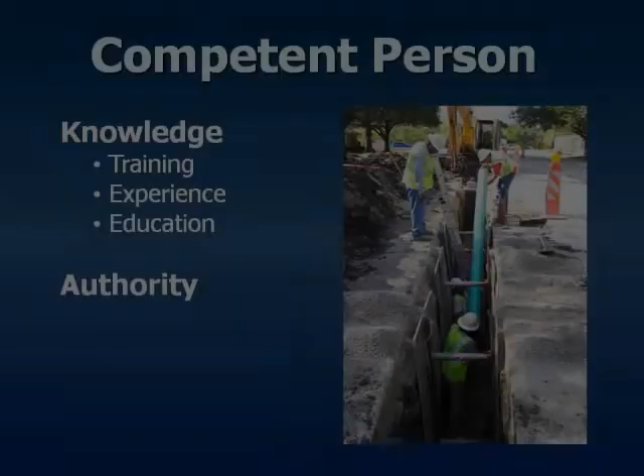For example, if you're going to be sloping and benching, that person needs to know how to do a soil classification and apply the appropriate slope. But another important aspect that people sometimes forget about is the actual authority. Typically, the employer or somebody has to designate that individual to be competent to have the authority over the work site so they can make those decisions and stop work if they need to make the appropriate corrective actions.

Once you choose that you're going to use sloping and benching as your method of cave-in protection while working in a trench, a competent person is going to do a soil analysis to determine whether or not they have stable rock, a type A soil, a type B soil, or even a type C soil. In order to do that analysis, they have to do at least one visual analysis and one manual analysis.

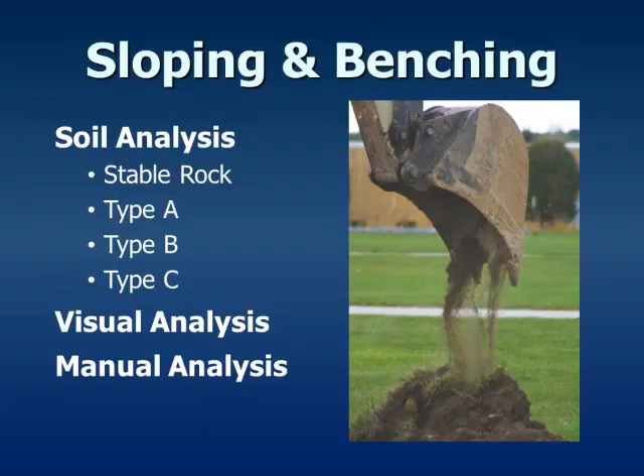Additionally, you're going to want to look around the trench, see if there's any existing utilities or any other signs to indicate that soils have been previously disturbed. Also, as you're excavating, you'd want to look at the trench itself and see, are you getting into where you've got maybe water that's seeping into the trench.

Once you do that visual test, you want to do a manual test also. There are a few different manual analyses that contractors typically use to determine the soil type. One manual analysis is used to determine whether or not you have a cohesive soil.

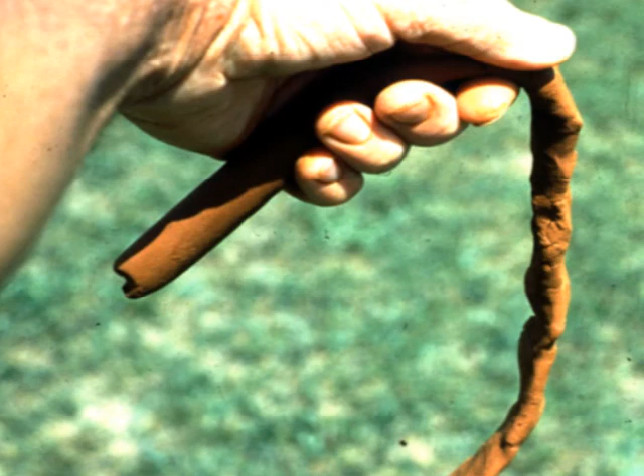That's commonly referred to as the ribbon test, which means you basically take a sample of the soil and roll it in your hands and try to thread out a ribbon that's about 1/8 inch diameter. And if you're able to do that and take a 2-inch length of that ribbon and hold on to it without it breaking, you would determine that you then have a cohesive soil.

Other manual tests you can do determine the compressive strength of the soil. You can use a couple tools with that, or you can use your thumb to do what's called a thumb penetration test, where you actually take an undisturbed sample of cohesive soil and push your thumb into that soil.

A more definitive test is to actually measure the compressive strength, and you can do that with a torvane shear, or a pocket penetrometer. And with that pocket penetrometer, you take the penetrometer and push it into an undisturbed sample of the soil and take a reading.

And if your reading is less than 0.5 tons per square foot, you have a type C soil. If it's between 0.5 and 1.5, you have a type B soil. And if it's better than 1.5, you could have a type A soil.

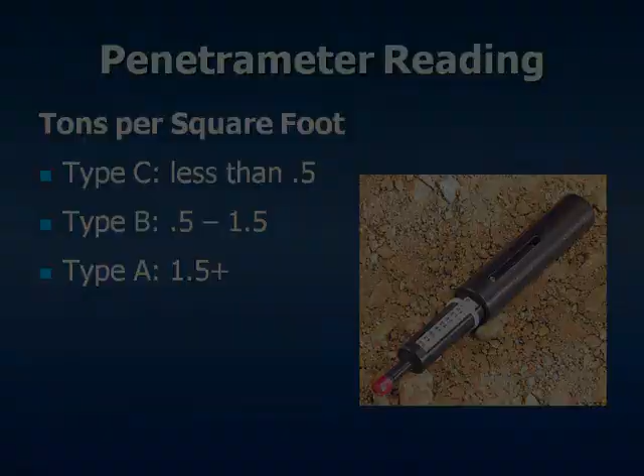Shannon, when we have layered soils or stratified soils, how do you classify that? Well, it's very common that you're going to have multiple layers in a trench. You may have a trench that's 10 feet deep, and the top 5 feet is maybe a type B clay material, and the bottom 5 feet is a type C sandy material. You're going to want to classify those layers individually to determine what types of soil you have. You have to slope it according to the weaker layer.

Now, any trench that's over 20 feet in depth, the sloping system should be designed by a registered professional engineer. For trenches that are less than 20 feet deep, based on that soil analysis you've done, you can assign the appropriate slopes. Now, if you have a type A soil, your slope should be at least 3/4 to 1.

That's for every 1 foot of depth, you have to cut that trench wall back 3/4. So if you had a 10-foot deep trench, you would have to cut that trench wall back approximately 7.5 feet. For type B soils, you're going to have a 1-to-1 slope, and for type C soils, you're going to have a 1.5-to-1 slope.

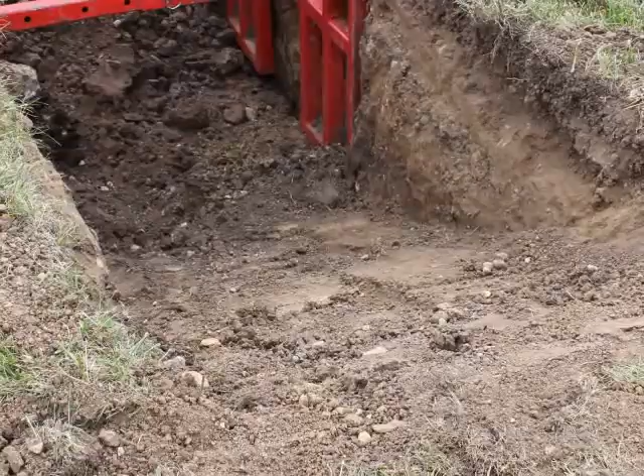An important thing to remember when determining the appropriate slope is if you're going to measure your slope, you need to start measuring from the bottom edge of that excavation or that trench wall and measure up.

In addition to sloping, another option you have is to actually bench the trench. Now, a bench is actually a situation where you're going to step up the wall of the trench. And there's a couple different benches you can do. There's a simple bench and there's a multiple bench.

A simple bench is where you put in one bench where you can come up vertically approximately 4 feet, then you go horizontally approximately 4 feet to make like a step. If your trench is deeper than 4 feet, then from there you can apply the appropriate slope moving up the rest of the way of the trench.

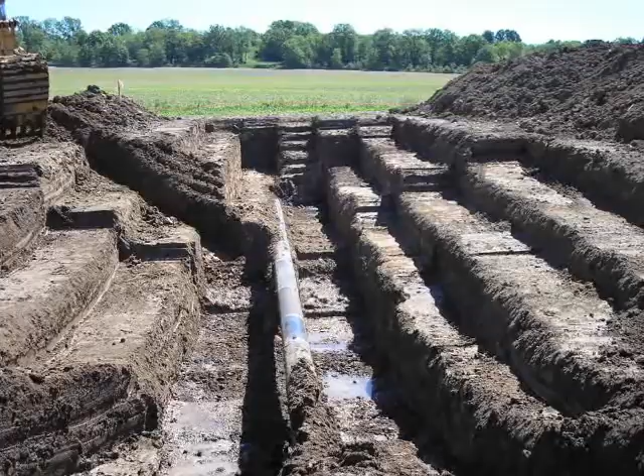Another option you have is the multiple bench, where you would do the same thing, except that when you make that first horizontal step of 4 feet, now you're going to start benching up, but you've got to make sure that you keep those benches behind that slope line. So if you've got that type B soil, you are still maintaining that slope, it's just that you're putting steps in. One key point to remember is that benching is something that's not allowed in type C soils. So for example, this trench we have here today, we've analyzed the soil as a type C, and we would not be able to bench in this type of soil.

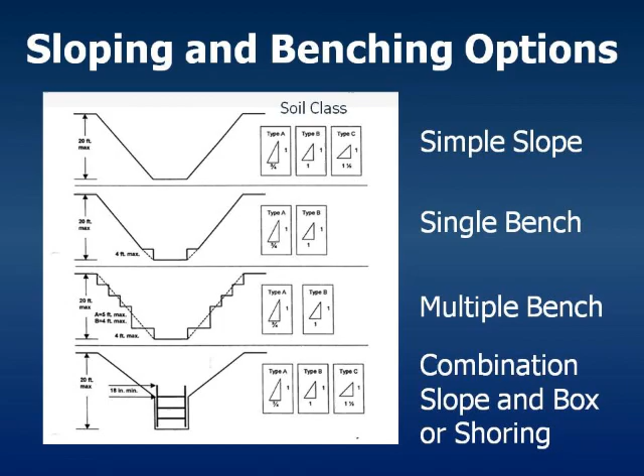Let's take a quick review. When sloping or benching, you do have a number of options. Once the soil is classed, you can excavate a simple slope, single bench, multiple bench in the proper type of soil, or you can use a combination of protection factors with sloping and installing a box or shoring system.

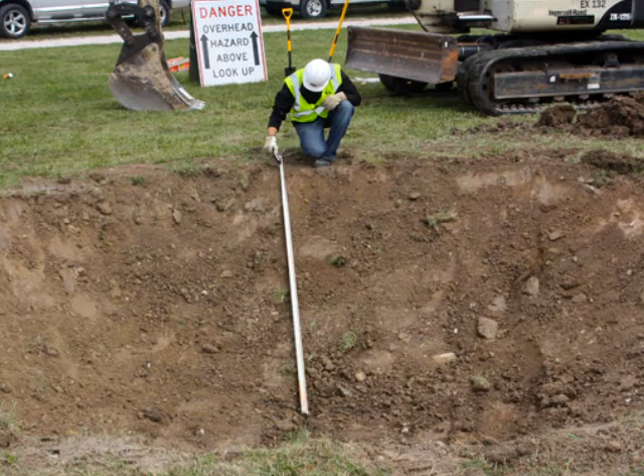What we have set up here today is we have a trench that's approximately 5 feet in depth. We've got a trench box that's been set in there, and then it's been ramped on each side for access and egress. What we've done here now is we've taken the trench box out and we've sloped the trench back to the 1.5-to-1 slope that this type of soil would require, which you can see we're measuring with our trench pole and our angle indicator.

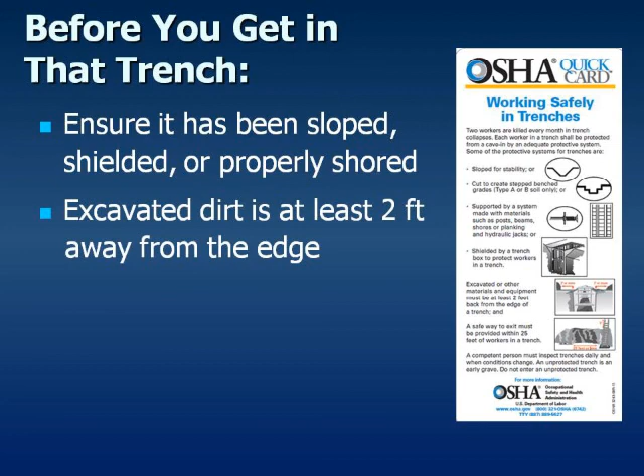Before you get in that trench, ensure it has been sloped, shielded, or properly shored. Excavated dirt is at least 2 feet away from the edge. There is a safe way to exit, and that a competent person has inspected the trench for your safety.

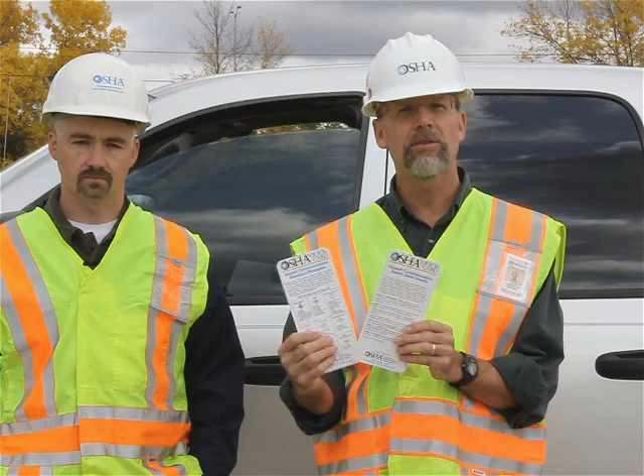Over the past year, OSHA has adopted 2 new standards. Number 1, we looked at our new hazard communication standard where we adopted the Globally Harmonized System. Essentially what that deals with is that we're going to be looking at new material safety data sheets called SDSs, safety data sheets, and we're going to be looking at new ways of product labeling. Over the next several years, employers have responsibilities for training employees as well as collecting all those new safety data sheets. OSHA's provided some fact sheets as well as new quick cards to help employees understand the new requirements.

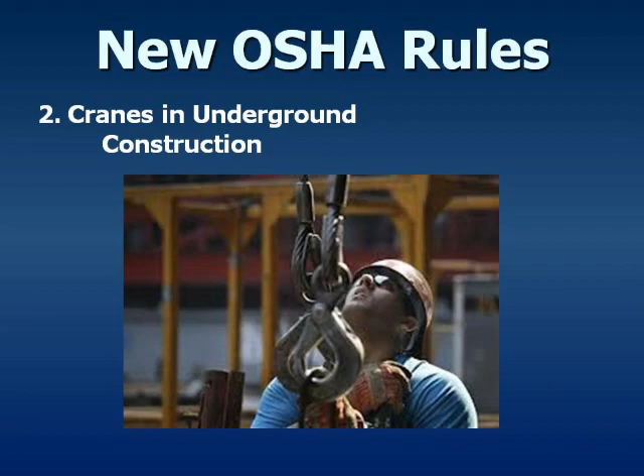Chad, the second change in this year's regulations was the adoption of the new crane standard. Yeah, with the new crane standard that took effect just in the last couple of years here, the underground construction industry was not covered by that standard. There's a change in the works right now where underground construction, which is primarily going to cover the tunneling industry, is now going to be covered under that crane standard. Chad, what have the inspectors been finding this year?

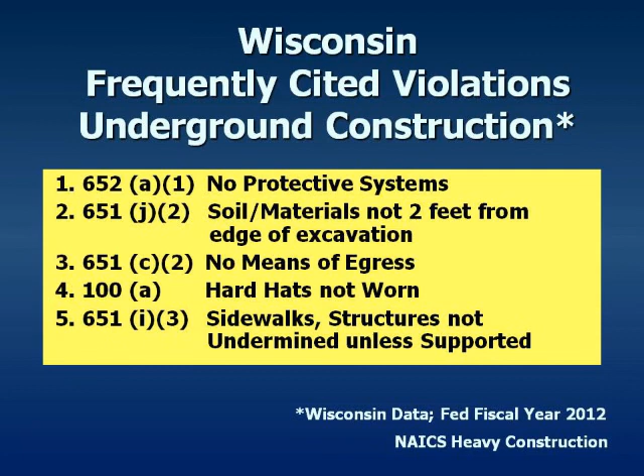Well, in the underground construction industry, the top 5 violations compliance officers have been finding include no protective systems utilized for trenches over 5 feet in depth, the soil or materials not being at least 2 feet from the edge of the excavation, no means of egress from the excavation, hard hats not worn, and sidewalk structures are not undermined unless supported. No protective system for working in trenches has been the most frequently cited violation last year, over 2 to 1 for the next most frequently cited. Almost half of the number 1 most frequently cited violations resulted in willful penalties issued to employers.

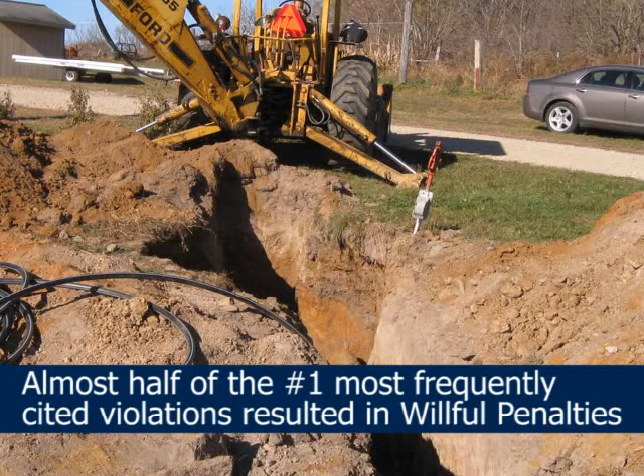For further information on excavation safety, OSHA provides a variety of resources through its webpage or through specific training programs offered through the Susan Harwood Grant Program. In addition, OSHA and the American Pipeline Contractors Association has also developed a fact sheet identifying excavation best practices for equipment operators and workers. You can also implement the safe digging practices as suggested by the Common Ground Alliance.